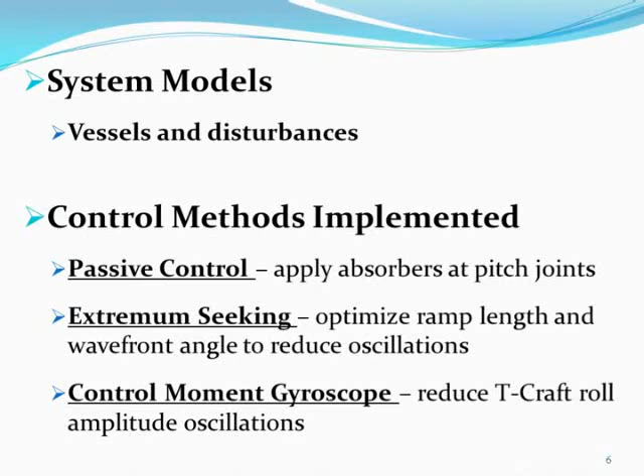In the forthcoming slides, I will explain the system models used and the three control theory applications investigated. First is passive control. It consists of applying absorbers to each joint between the ramp and vessel. Second is extremum seeking. It can be thought of as a passive tuning method where key parameters are optimized so that a desired system response variable will seek to a maximum or minimum neighborhood value. Third is an active control method, where a controlled gyroscope is simulated on the T-craft to reduce its roll motion.

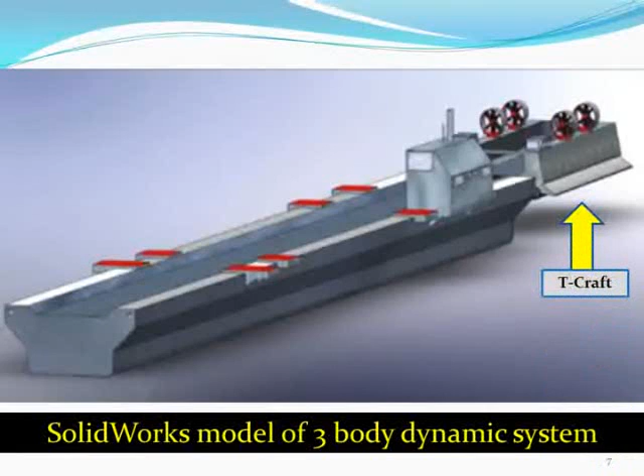My ultimate goal was to determine the sensing and actuation requirements to devise control and real-time optimization algorithms to stabilize the T-craft's roll, pitch, and heave degree of freedoms. This will ensure safe cargo transfer from the sea base to the amphibious T-craft.

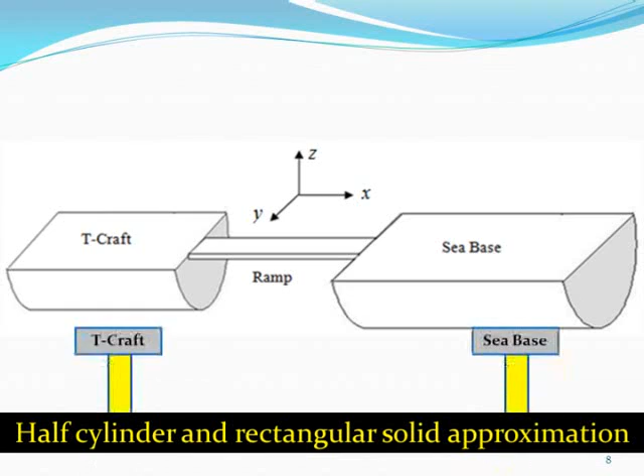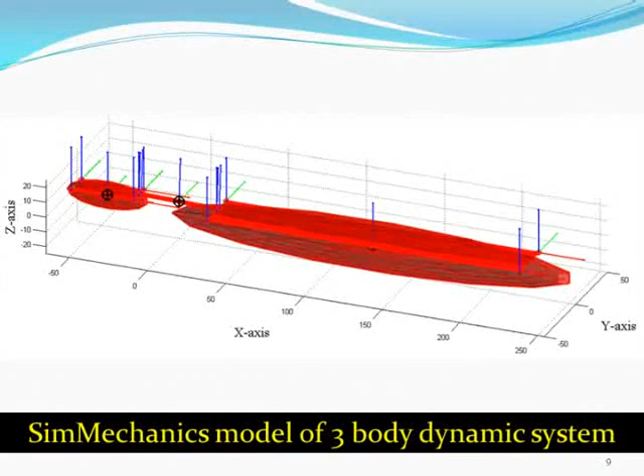Due to the complexity and nonlinear nature of the dynamic model, the system was initially modeled with half cylinders for the vessels and a rectangular solid for the ramp. Once the mass and geometrical properties of the system is input into the SimMechanics model, which is a toolbox within MATLAB, the necessary analysis can be performed.

Typical environmental disturbances that would affect the system at sea include waves, ocean current, and wind. However, in the forthcoming simulations, I have neglected the effects from current and wind and consider the ocean waves as linear planar waves and affect the system as would a spring and damper connection to the ground.

The ocean waves were modeled using the Pierson-Moskovitz spectrum at sea state 3 and 4, which correspond to a significant wave height between 0.5 and 2.5 meters. This spectrum is a distribution of the wave energy versus angular frequency for a given sea state. As shown, the larger the wave height, the more the energy of the modal frequency wave is shifted to a lower frequency range.

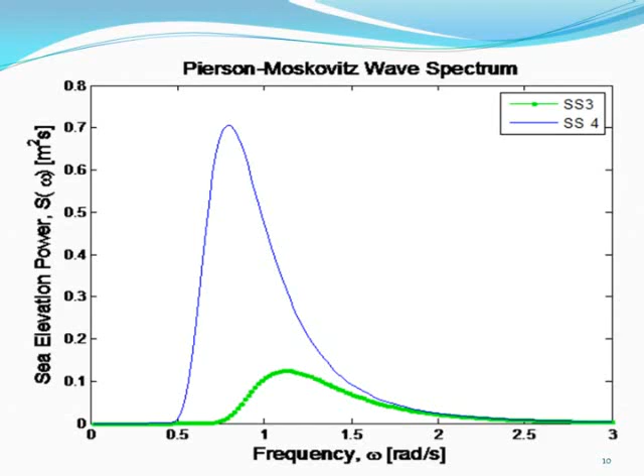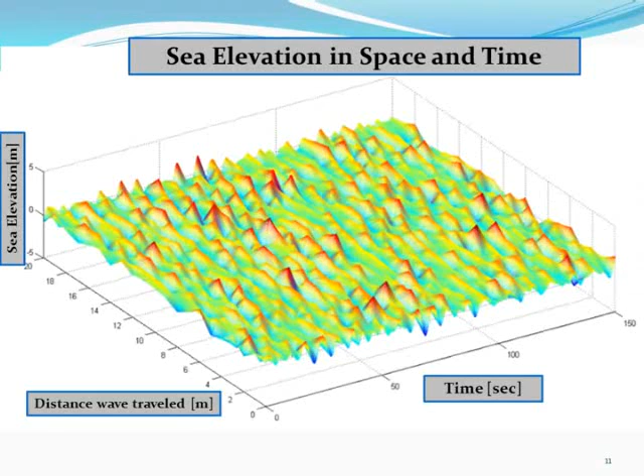The sea elevation profile produced from the Pierson-Moskovitz spectrum when marched in space and time looks as follows. It is assumed the ocean waves disturb the system at all angles shown, with the blue lines corresponding to the phase shift at each point relative to one another, and the wave forces impact the system at the vessel corners as shown.

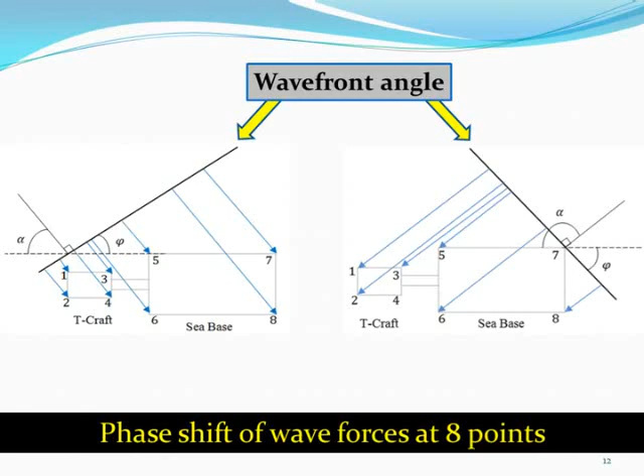Until now, I've talked about the various models for the static system and environmental disturbance. Now I will shift my focus to the dynamic modeling of the system and control theory applications.

Before I begin to present the control applications and results, I'd like to briefly present the system's equations of motion derivation to convey their innate complexity. I use the modified Lagrangian mechanics approach to derive the equations, which account for dissipative forces as a function of velocity due to the damping effect.

In short, the total kinetic and potential energy terms comprise Lagrangian L. Then, the total dissipative forces and moment terms, d, and the applied external force and moment terms, capital Q, were derived and plugged into the Lagrangian partial differential equation. To conclude the derivation, I then differentiated the equation with respect to each generalized coordinate and simplified.

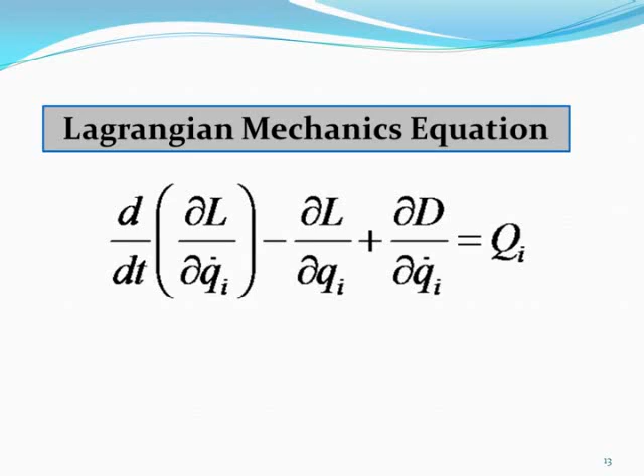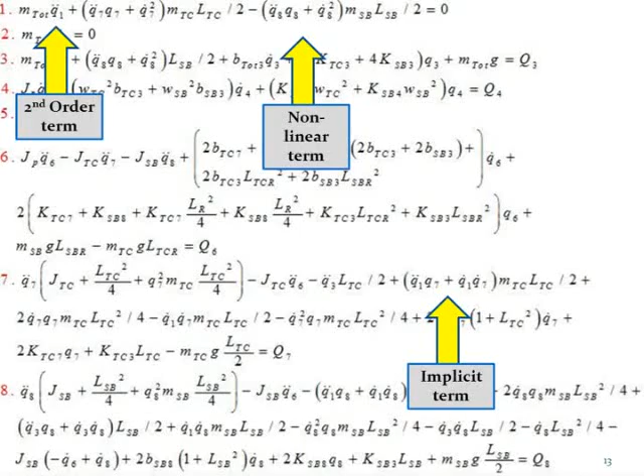Due to the complexity seen with the second order, nonlinear, and implicit terms, these equations could not be solved analytically. Rather, they were solved computationally through MATLAB's built-in numeric solver.

Notice the inherent oscillatory nature for all 16 states in both the position and velocity solution graphs. This behavior is influenced by the ocean wave motion that continually disturbs the system in a spring damper-like behavior.

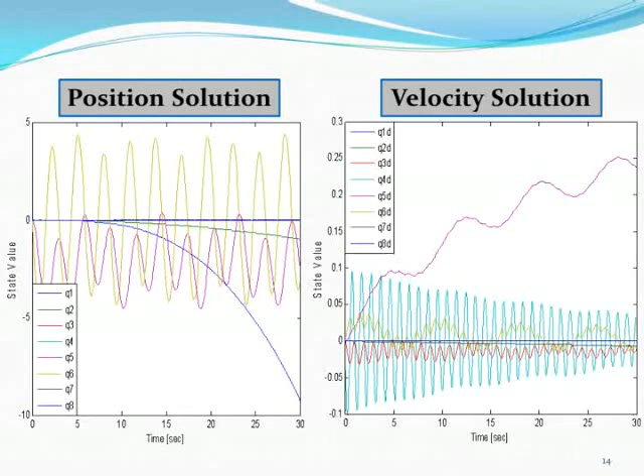I was able to passively control the system's response and produce meaningful results by applying a spring damper block between the joints in the SimMechanics model. As shown, the max angle with no passive control is plus or minus 10 degrees, while with passive control it is plus or minus 0.1 degree. The following video clip shows that the resulting motion is relatively stable.

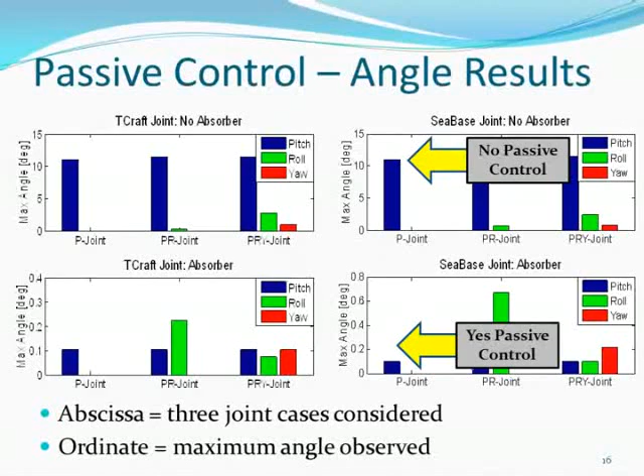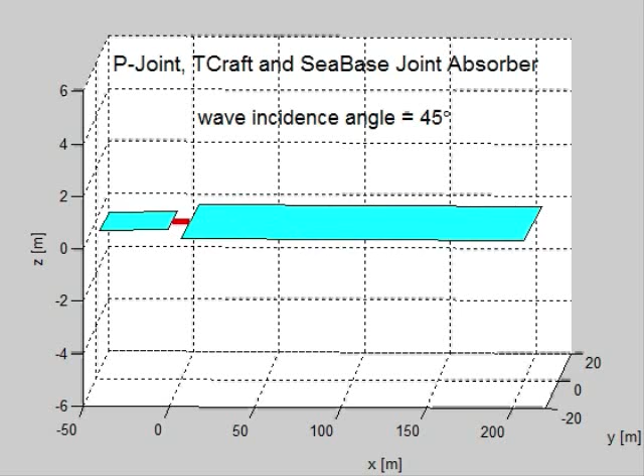The next control method implemented on our system is called extremum seeking, whose block diagram looks as shown. This can be used on a variety of systems provided that there is a local min or max neighborhood of system response values. If the system has no innate concavity, a penalty function can be introduced into the block diagram to bypass this issue and allow for the algorithm to function properly.

The resulting signal J is known as a cost, which maps out any desired system-generated value for any given range of input values, which in this case is the ramp length R.

The signal J is then passed through a washout filter, demodulated by a sinusoidal signal, integrated, multiplied by a gain, and passed through a second-order low-pass filter to produce a modified ramp length value R hat, which causes the system response to get closer to the desired extremum. Over time, the R hat value seeks to its optimal value corresponding to the minimum system response achievable for a given input.

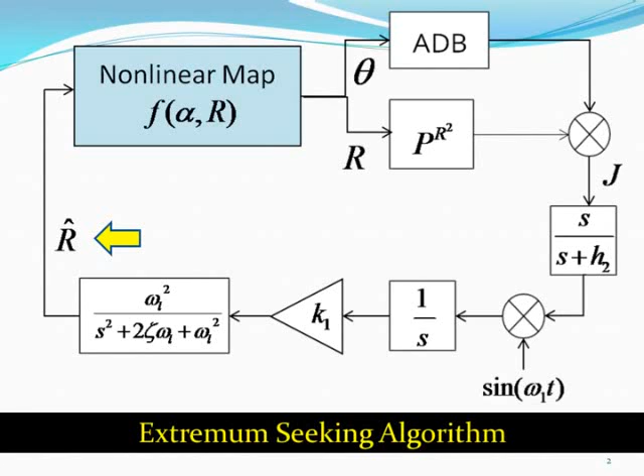The cost map, or signal J, has an obvious optimal ramp length around 12 meters and a wavefront heading angle of about 30 degrees. Independent of their initial values, the extremum seeking algorithm will tune the ramp length and heading angle to their optimal values, as the following graphs and videos show.

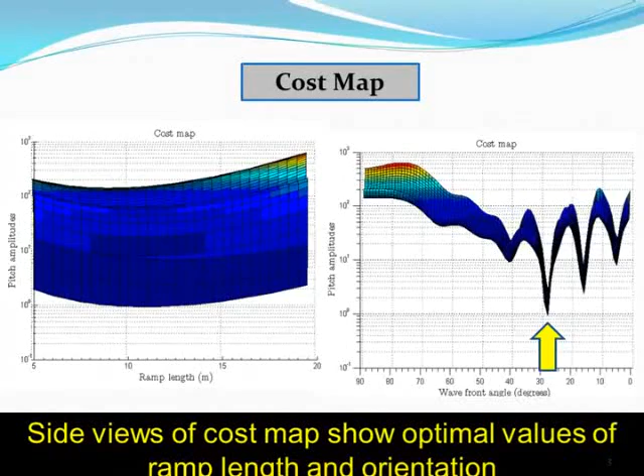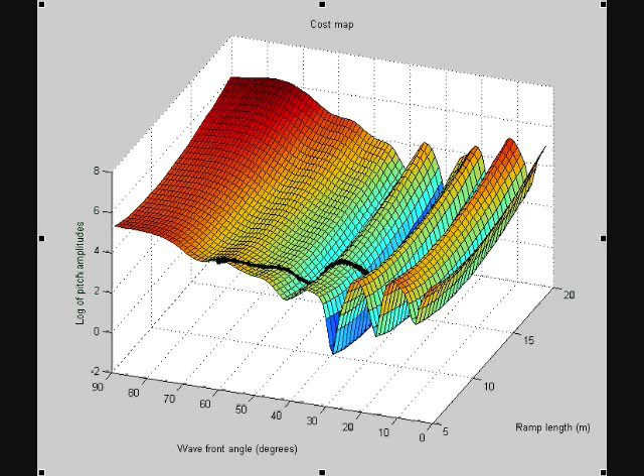The final control method implemented is an active control method using a control moment gyroscope. The main point of gyroscopic theory is the precession phenomenon, which I will explain with an example. The ultimate goal is to reduce the T-craft's roll or oscillatory motion about the x-axis.

The main part of a gyroscope is its flywheel, which constantly spins about the z-axis. When the vessel rolls due to an ocean wave, a precession motion occurs about the y-axis. A sensor usually triggers the actuators or hydraulic braking system to counteract the precession with an equal and opposite moment. Now this produces yet another moment in the opposite direction of the input roll to potentially eliminate the vessel's roll and promote a higher degree of stability.

The equations of motion used for this simulation solely account for the degrees of freedom relevant to the T-craft and gyroscope system.

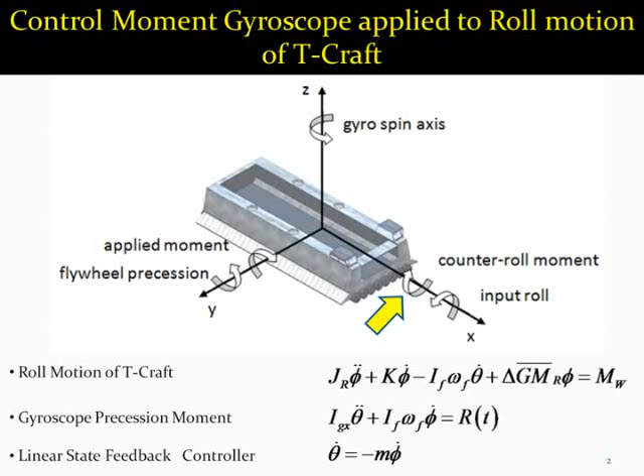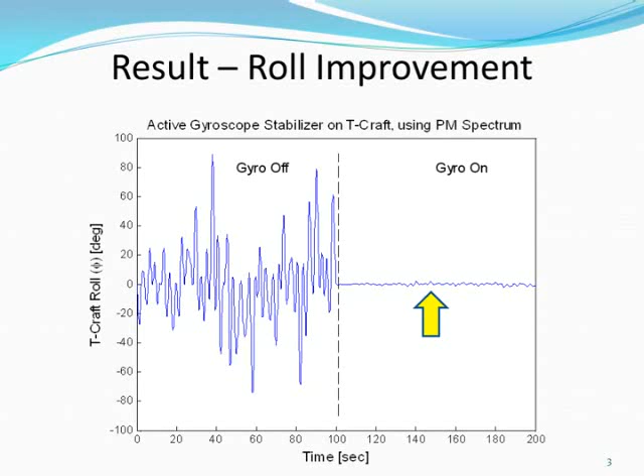As shown, comparing the system's behavior when the control moment gyroscope is off to the response when the control moment gyroscope is on, we see a major improved stability in the T-craft's rolling motion.

The gyroscope control application is a great example that requires redesigning the cost map if one plans to integrate it with extremum seeking. The logical parameters to optimize are the flywheel's moment of inertia and spin velocity, while the variable to reduce is the vessel's roll.

This concludes the graduate research summary during my graduate year at UC San Diego.